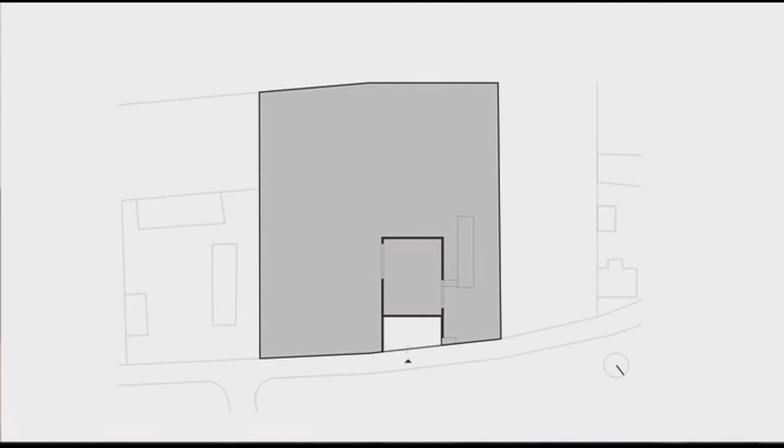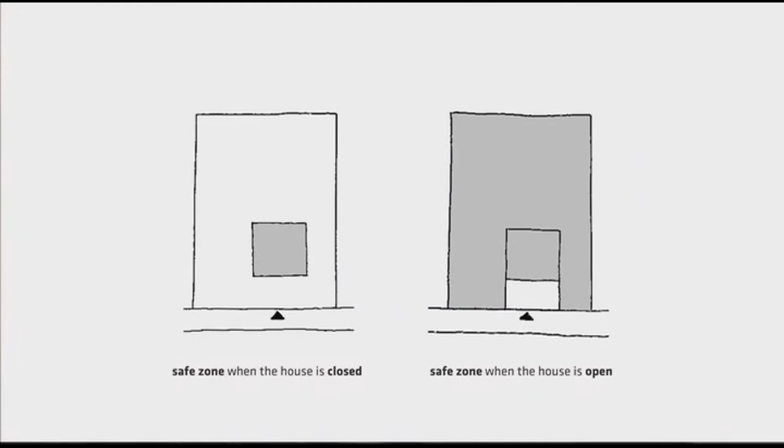Again, so what? If the parents are in the garden and, for example, they're celebrating something, the child opens the door to someone by using a home phone. That someone comes in and reaches just this area, which is the area in front of the entry, and that's it. He or she waits to be let in or not. The clue is in the fact that he or she cannot enter the garden. To reach the garden, he or she must pass the whole building.

If the house is closed, the security area is incorporated in the house outline. If the house opens to the garden, the two walls run to the fencing. In this way, the security area is enlarged thanks to the surrounding garden. The innovation of this building is based on movable elements which intervene in the layout of the lot and change it accordingly. This is the first building of this kind in the world, and it's more than just a house.

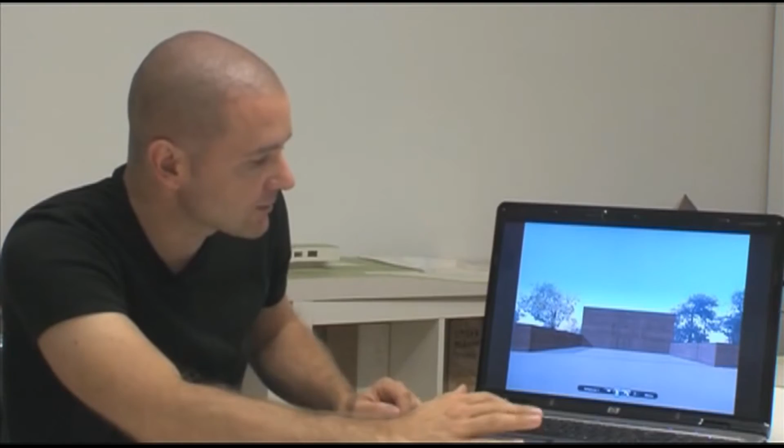The most important thing is where the idea of this building comes from. Does this view remind you of something? Actually, I should show the idea on the draft. More specifically, it reminds one of an atrium house, because at the time of the first rejected project, I started to draw just an atrium house.

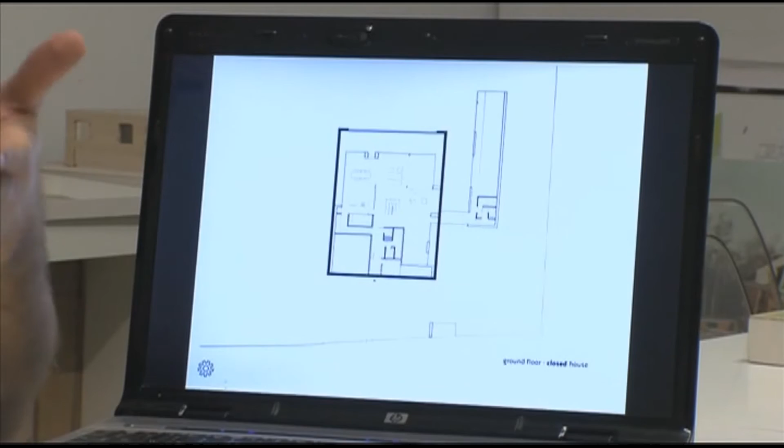When I had come to my office, the idea of an atrium house was very strong in my head. The atrium house is designed so as to pass the atrium of the building to reach the garden. However, the problem was that everything happened on 2 levels. Now, everything is on 1 level. And this is the most important idea. The walls can move themselves, I thought. So now the building opens and closes. And this is the beginning of the idea and virtually the beginning of this building.

Complicated mechanisms mean that the house acts as a live organism. Now, let's concentrate on those mechanisms. Here, we can see the ground view.

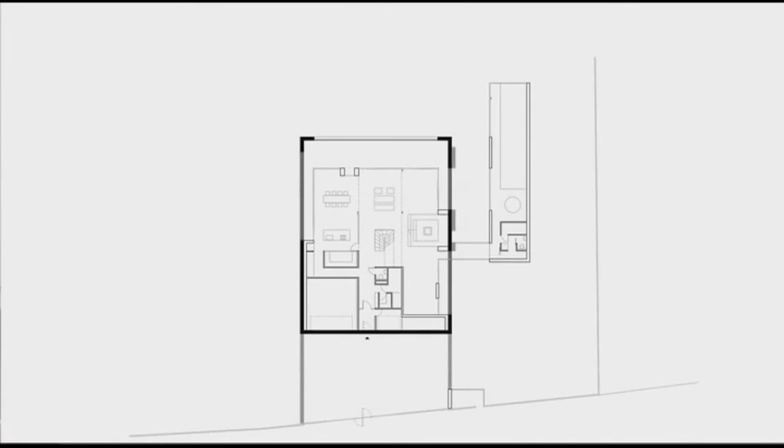Here we can see the moment when the walls are running at the fencing. The whole building opens, revealing the layout of the floor and a kind of pavilion. There's the swimming pool. As it was outside the strict security area, it's in the garden. But does this matter? This is just a view from the garden when the building is closed.

The house is open. The moving wall is 22 meters long and 2.2 meters high. The window shutters are 2.8 meters high and 3.5 meters broad. All these elements have the same exact thickness of 45 centimeters as the outer building walls.

We can see the house from the south. Next, there's the swimming pool. On the roof, there's a terrace which can be reached through a passage over a drawbridge, which is the next movable element of the building.

This is the south facade, slightly covered by a huge gate. There's one story with reference to this gate.

When designing this building, we asked several companies to quote us a price for such a stately gate with really huge dimensions, 14 by 6 meters. We received quite a lot of offers, all of them with prices around 20 or 30,000. Today, however, one company submitted a price which was roughly 10 times higher.

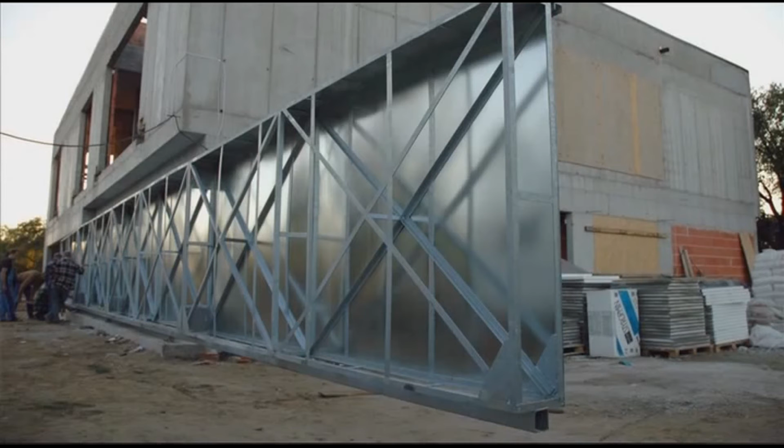The huge movable blocks are 22 meters long, 2.8 and 2.2 meters high, and almost half a meter thick. They are really impressive. Now it's time to explain how everything is built and how it works.

This is the structure of the longest movable wall of the building. It's a steel beam, and its thickness, which is close to the thickness of the wall, is based on the fact that it's filled up with rock wool. This is the reason why this beam and other partitions have very good insulation properties.

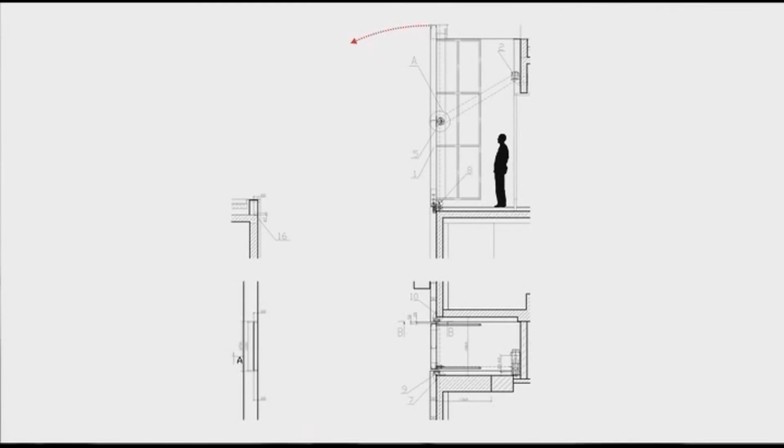It's driven by an electromotor which is built into the wall. The same method is used in all movable elements of this building: window shutters, roll-up gates, or the drawbridge.

A question could be made concerning the cladding material. Naturally, it's wood, a light material, water-resistant alder plywood stained appropriately. At this moment, the clients themselves, under our influence of course, deserve credit for choosing the right color. The results are really good. But it's not the only reason why it succeeded.

Let's go from the mechanisms to the next face of the house, to the organicness. A country house means old barns and dark wood. This is another reason why we used such materials, to fit together with the country-friendly atmosphere. And this house is just like this, a lazy, quiet house.

When you're inside, you think that time has stopped. It's a really beautiful place. The view inside through the opened window shutters could be a little different, but it continues such old country houses and shows very pleasant spatial interiors created by the customers.

From my personal point of view, the building is very interesting thanks to the interconnection of the architect's and the customer's worlds. It was the customer who created this whole space according to his idea.

An interesting moment in the life of the building: it absorbs light during the entire day. But when darkness comes over the building, the process turns over. At that time, it starts a light emanation. It's the inner light which will be closed in its contour in a moment. The house will be closed to protect its inhabitants and to accumulate energy gained during the day.